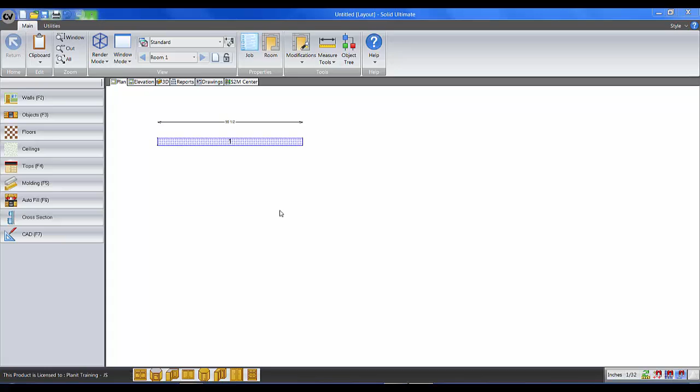Welcome to today's TechCast. Today we're going to be looking at how to set the reveals for your doors on the front of the cabinets. I'm going to go ahead and place a base cabinet right there.

The way Solid sets the reveals depends on what type of construction you are using. For 32 millimeter, we have no frames around the box. The same is true for frameless. But with frame overlay, we have a face frame behind the doors, but the doors grab the reveals the same way the 32 millimeter does. In face frame, you don't have a reveal so much as an overlay, where the door overlays the frame parts a certain amount. Let's take a look at these.

I'm going to go into the 32 millimeter and look at the reveals, see how they're set up right now. So I have an 1/8 of an inch pretty much all the way around. Let's take a look at the cabinet and zoom in. To clear up this confusion, I'm going to do the fill mode, so you can see we have the drawer front here and a little reveal of material around the edge of the cabinet. If I measure that, we should have 1/8 of an inch, which we do. If you look over on the sidebar, you can see that's an 1/8 of an inch.

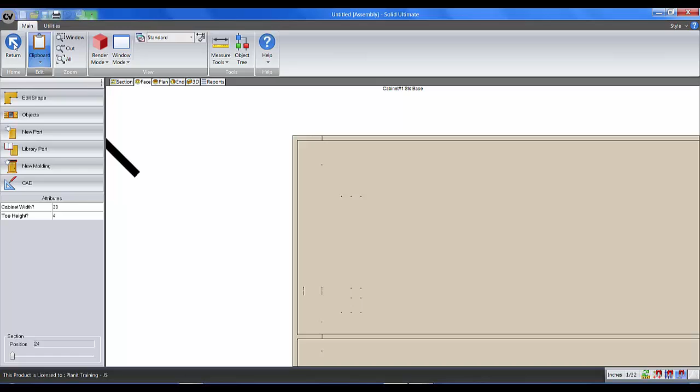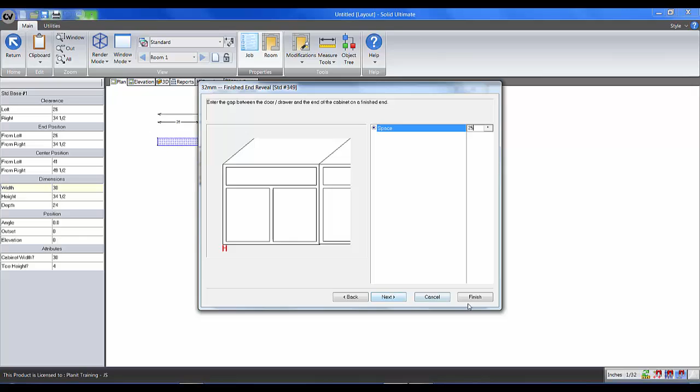Now, just to prove that it is pulling from the reveals, let's go back and change the reveals and see what we get. Let's change this to 1/4 of an inch, and another 1/4, and one more, and I think that's good. So now let's take the cabinet back into the editor and zoom in. I think you can already tell it has definitely moved. And there we have the 1/4 inch again on the sidebar.

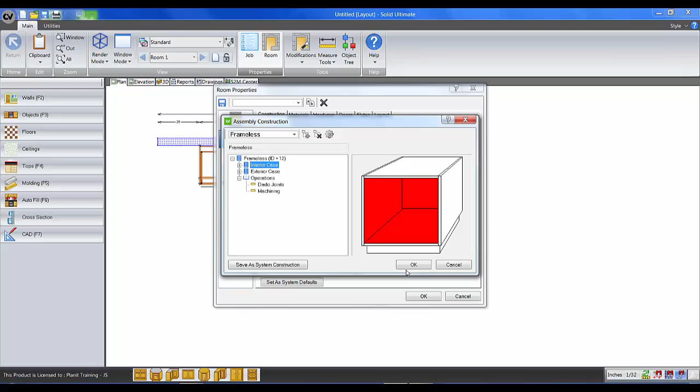So as you can see, it's pulling directly from the reveal section of the construction method if you're using 32 millimeter. The same applies for frame overlay and frameless. Just so you understand the difference between frameless and 32 millimeter: frameless is an older construction method originally used primarily for design purposes. It does not give you line boring. If we click there and look at this, you can see there are no line boring operations. We keep this construction style because some people still want to use it, and someone may find a use for it in their shop. That's why we hang on to it. But the majority of builders are going to be using the 32 millimeter, and this gives you access to your boring.

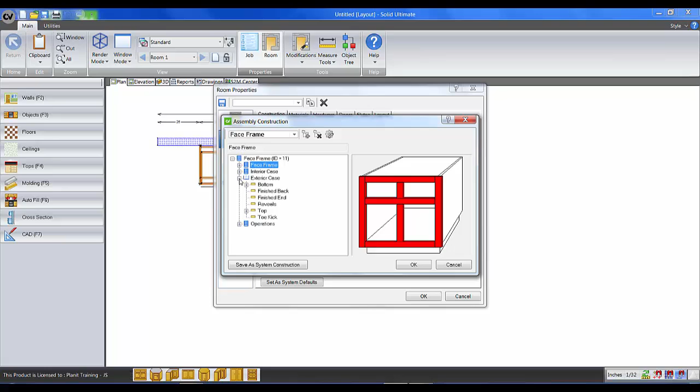Now, of course, a face frame construction method has a frame around the front. So as I mentioned, we're not dealing with the reveal between the edge of the door and the edge of the cabinet with face frame. We're dealing with how much the doors overlay those face frame parts. So let's go into the exterior case. I want to show you what I'm talking about. So we have a 1/2 inch here, 1/4, 1/4, 1/4, 1/4. Let me change that one to 1/4 so that they're all the same.

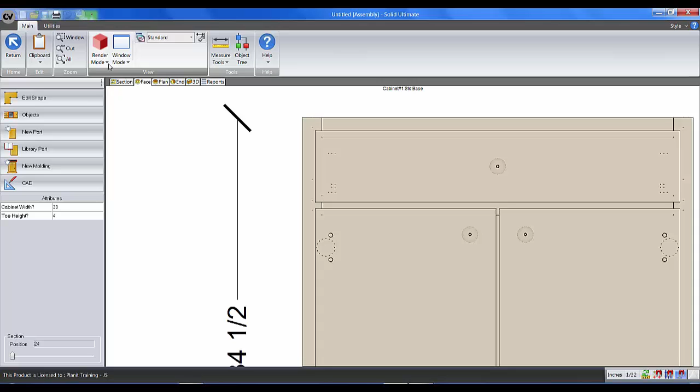Now let's go look at the cabinet and see what we've got. As you can see, we have a large reveal area, but that's not what we're concerned with on a face frame cabinet. We're concerned with the amount that the doors overlay the opening. So with this being the door or drawer front, let's measure, zoom in a little, and there we have a 1/2 of an inch, as you can see on the sidebar. Now where is that coming from? It's coming from the hinge that's on this door. If we go to hardware, I have a 110-degree Euro, which has a 1/2 inch horizontal and vertical overlay amount.

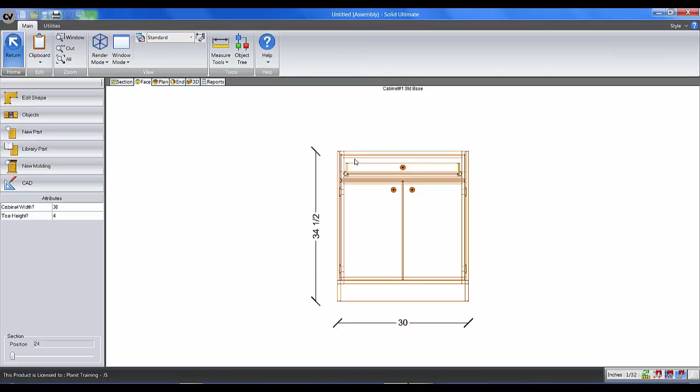Now, to prove that, let me go into a 5/8 overlay. I created this a little bit earlier, and I know it has 5/8 overlays for the horizontal and the vertical. Let me get my bearings again. And if we measure the edge of the door to the frame opening, we have 5/8 of an inch. So your face frame is pulled from the hinge that you are using on that door.

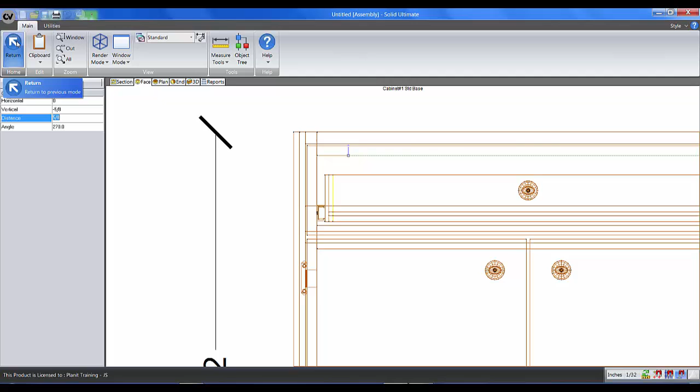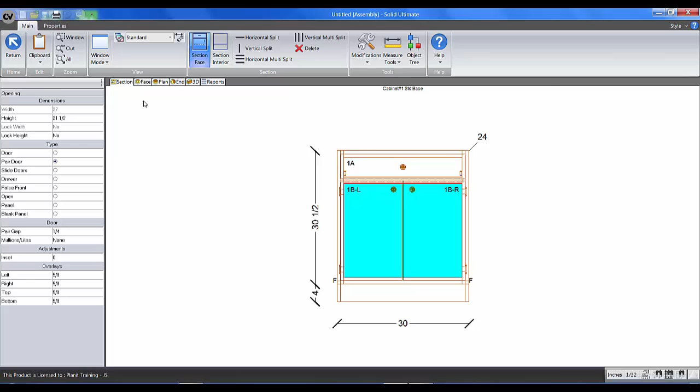Now the only exception to these rules is for the face frame where you have a pair door. The pair door has no mid-stile. If it had a mid-stile, it would pull the overlay amount just like it does on the other three edges of the door. But since it has no stile, we treat this like a frameless cabinet. So the pair gap, as we call it, is actually being pulled from the reveals, and I have 1/4 of an inch there. So let's go see where that 1/4 is being pulled from.

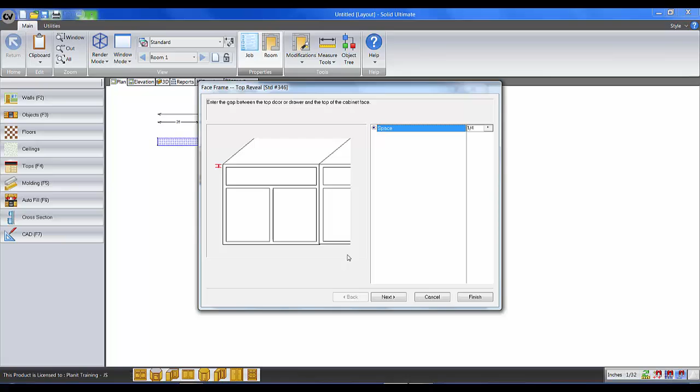If we go into the room properties in the cabinet, go into the reveals, there's our 1/4 of an inch right there. So this is the one exception when you have a face frame cabinet: the pair gap is pulled from the construction method itself. Those of you who have been with us a while probably remember we used to have a setting called the pair gap, a separate setting in the preferences tabs. That has gone away, and we are pulling everything from the reveals now.

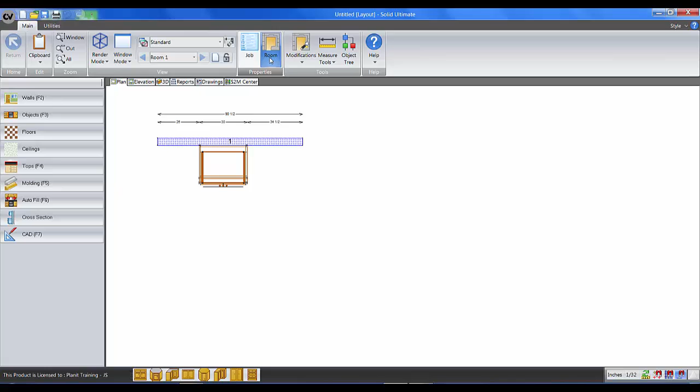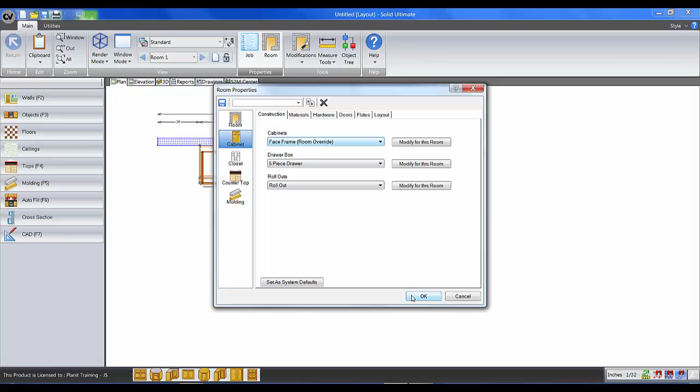So to get your doors to show the proper reveal or the proper amount of overlay, let me recap one more time: the three construction methods, 32 mm, frame overlay, and frameless, pull this information from the reveals within the construction method. If you have a face frame, it's pulling the overlay amount from the hinge being used on that door. I hope this clears up any confusion or questions, and we thank you for watching. This completes today's training movie.